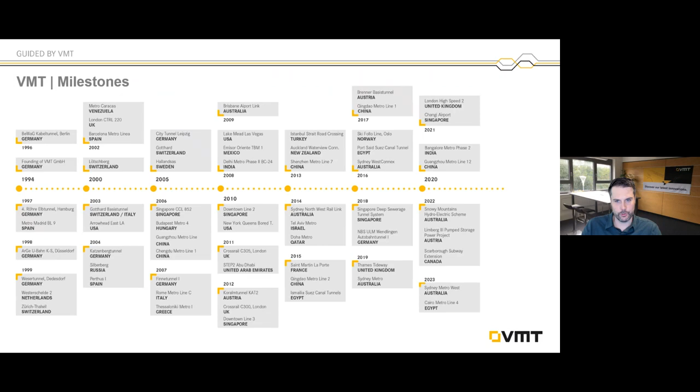What does VMT actually do? It's also important for me to share with you a little bit the portfolio, to have an understanding of where we are involved and how. There's obviously... great, now this animation here isn't working anymore.

It worked before testing, great. Anyway, TBM guidance, and not just purely for guidance of big segmental lining machines, like I mentioned, the Scarborough machine or the Eglinton machines.

You also have to consider smaller diameter tunnels, microtunnel. So there's also a lot of microtunneling work in Toronto, and we're talking in comparison, like a Scarborough 12-meter roughly ID versus 1200 millimeter, so 1.2 meter ID.

So there's a big variety in terms of tunneling, also tunneling methods that we are covering with our solution.

That also means not just TBM driven tunnels are equipped with VMT guidance systems, but also for conventional tunneling with road headers or excavators.

We have proper solutions so that they also ensure they can cut a proper profile with the machines, so they don't over excavate and cut more material out, which results eventually also in more shotcrete, more cost, etc.

A vital part for the segmental lining projects obviously are also the precast segments. So in the production of the precast segments, that also requires proper logistics, proper handling of these segments in terms of the storage, documentation about damages.

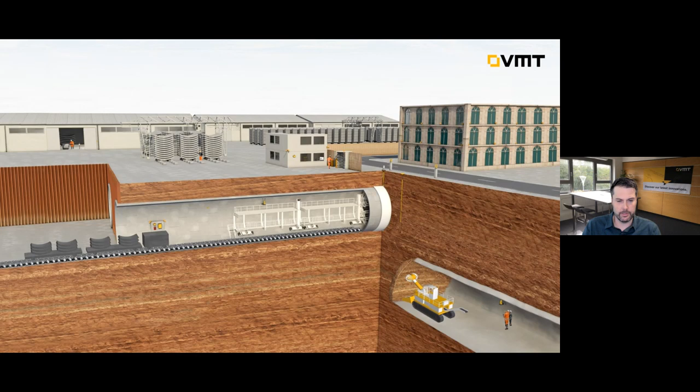They have post-tension rings, so they also have to make sure at what time they have to set in what type of segments, because the longer the tunnel gets and you set the wrong segments in, that means...

...downtime on the machine because they have to send the segments back to the surface, send another train in, and this is also what you want to avoid.

We also know that on each job site, communication is the key. So how people communicate is essential, and these systems can at least contribute to the communication in terms of automating certain processes more.

That's a tendency that we all see where the industry is going, more automation systems, trying to, I wouldn't say take away the work from the people, but definitely we're trying to minimize human error with these solutions.

Eventually also going towards automated TBM steering, automated mining, automated ring build. So that's definitely where the industry is going right now, and all these TBM manufacturers are working on it, as well as their suppliers.

And for the segments, one crucial thing is also the accuracy of the segments in terms of the geometrical accuracy. For sure, we're talking about concrete quality and so on, but that's also an essential part.

These segments have sub-millimeter accuracy, because they're little puzzle pieces, like a jigsaw. You need to put them together and you want to make sure they fit nicely.

For this, we do very precise measurements with what's called a laser tracker, where we go to the facility where they make the segments or where they have the molds. We measure them and compare them to the designs, make sure they're on tolerance. You want to make sure these segments are on the right shape before you send them into the machine. You don't want to be in trouble down there and figure out later that you have problems with cracks on the segments because of bad geometry.

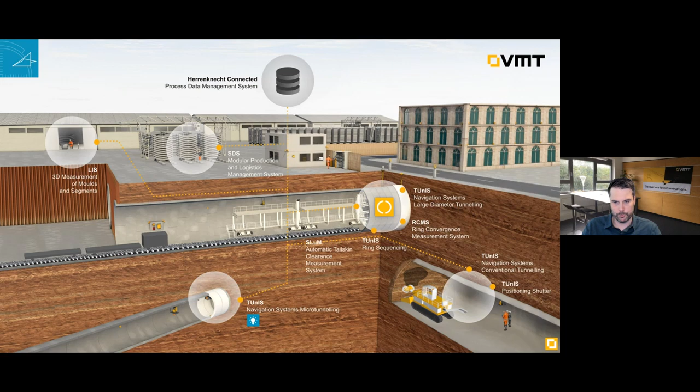So here's the short description about it, what I just briefly explained, but normally there was an animation which should be working but didn't work.

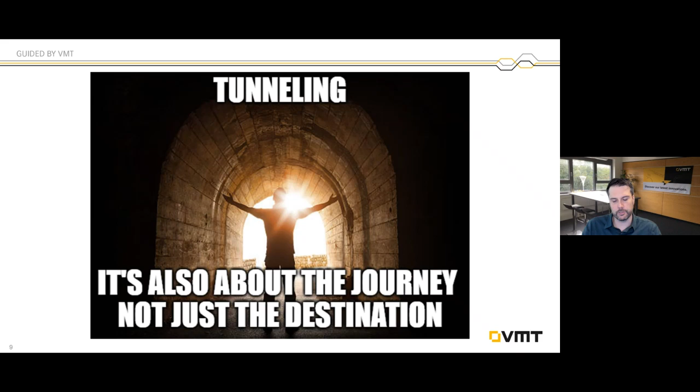What's also important for us when we consider the guidance systems or any other solution we provide, it's about the journey, not just about the destination. For sure, the goal is we need to arrive at point B, but how do we get there? How do we improve our workflow? How do we reduce the risk of people making mistakes? How do we ensure that we detect problems early? This is also a part for us, how we can contribute to it as VMT.

In terms of the guidance system itself and how they contribute, it's for sure precision and accuracy. That was also written in the abstract to this presentation - millimeter accuracy. But it's not just about the system itself, it's also about the people using it. People need to be educated, need to have the understanding to use the tools properly. Guidance systems also contribute to safety.

If we're going offline in a tight curve and we have to steer back with an even tighter curve, what would happen? We might have problems on the segments causing cracks. We have water inflow and so on. So we have direct or indirect impact on safety.

You also want to make sure that the systems are working efficiently for the job sites and they're not causing delays in mining. You don't want to stop a machine because the guidance system is not working. So you also need to consider that the system is well integrated on a tunnel boring machine.

As I mentioned earlier, automation and innovation - the systems are evolving, the technology is evolving, the sensors we are using give us new opportunities. But having these new opportunities with the systems eventually also allows a machine manufacturer to have progress in their developments as well.

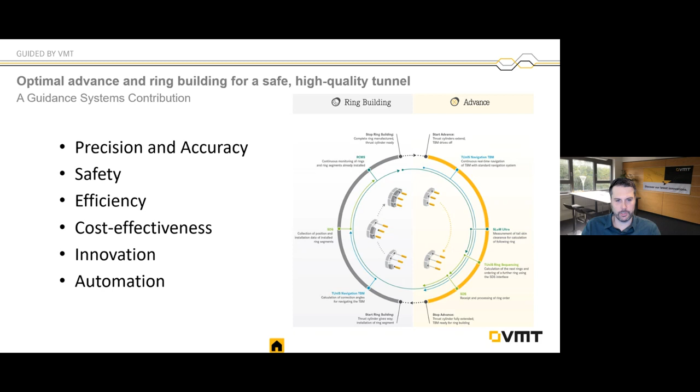When it comes to selecting a guidance system, we are mainly focused now on actual TBM tunnels. So overall, we need to see what kind of method do we have. Are we having a conventional tunneling method? Do we have a segmental lined tunnel? Or do we have a hard rock tunnel with a gripper machine where there's no segmental lining? Or do we have pipe jacking? This defines, first of all, the machine design can define what kind of guidance system is being used.

On the smaller tunnels, you also need to see what are my tolerances, like on a micro tunnel for example - that decides if you can just go with a simple laser because it's a straight run, or if you need to supplement the system with additional sensors to make sure, because of the distance, that you can ensure to be within a few millimeters over, let's say, 1,000 meters of micro tunnel.

And even ground conditions can affect the actual system. Not all systems are optical systems, which require line of sight. The majority of guidance systems use total stations, but there's also what's called a gyro-based system.

A gyro is more or less like a compass, an electronic compass, and gives you a direction. As this compass is traveling, we can calculate where the machine is going.

But these gyroscopic systems are very sensitive to ground conditions. When the machine, for example, is drifting, these gyro systems might not detect it. And then when you do a survey check, you see deviations.

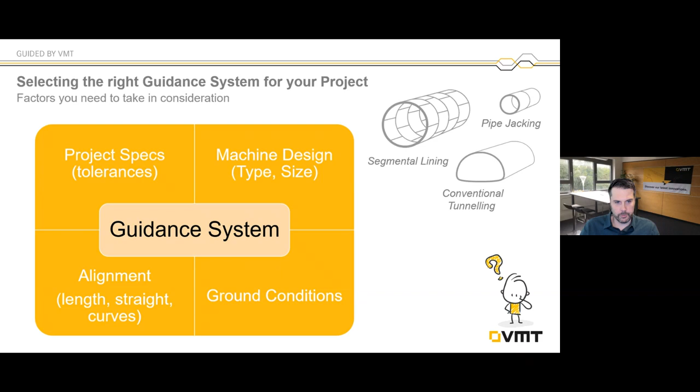But at the end, it's not just the equipment, which is really important to say. You can have the best guidance system, but you also need the right people for it. You need people who have the education, the understanding, the background for it.

And we're seeing this more and more: there's a lack of experienced people on the surveying side in tunneling. There are currently a lot of tunneling projects in North America, but unfortunately people are retiring, and there's not a lot of new generation coming. We've seen that contractors didn't really fill the gap or foresee the future in terms of bringing a new generation on board early on.

Now people are already phasing out, and all this knowledge is gone because there was no proper handover over, let's say, 5 to 10 years. And you're not born as a tunnel surveyor. Nobody is. There's no education for it, no school that can give you all the tricks you need other than going out there in the real world.

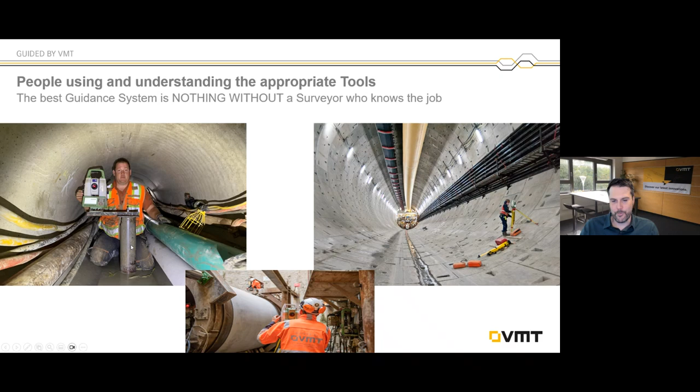When we come back to the guidance system, really important as part of achieving the accuracy of a system is also the surveying part, without going into depth here. But it's really important that the contractor, whether they have a subcontracted surveyor or their own surveying team, really understands what is needed and what the potential costs are.

As a surveyor, you're always at the bottom of the food chain too. A surveyor never really gets attention until the machine breaks through — that's when you get the most attention, or when you go offline. But when it comes to covering costs and how much contributes to survey, they always keep you low on this, and that's very unfortunate because we play a really essential part in it.

Probably everybody contributing to a tunnel project says this, but eventually we should always keep in mind the risks of getting offline — the risks of having a tunnel where utilities are pretty close, existing gas lines, and the risk that you could mine into one of these.

I don't know if you've seen the video of the drill that drilled into a tunnel in Turkey recently and hit a subway tunnel — obviously bad as-built, bad data, bad information, who knows, but also somehow related to survey. So always have an open eye and an open ear for your surveyors, because most of them know what they're doing and know what they need.

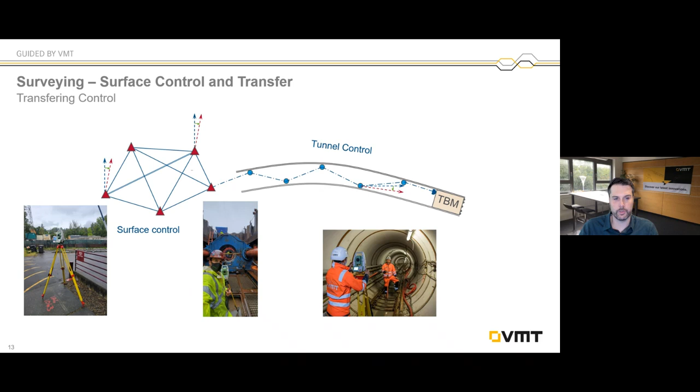And to achieve accuracy on longer tunnels, there's something called a gyro verification survey. There are companies offering these solutions. And this is not the guidance system, this is really surveying related.

Surveyors really need to come up with a concept for how to transfer all their survey control from a portal, from a deep shaft, or from the surface, first into the bottom of a deep shaft, and then transfer it from there all the way to the front of the machine. Because each guidance system, no matter what it is, needs independent checks, not just for your peace of mind.

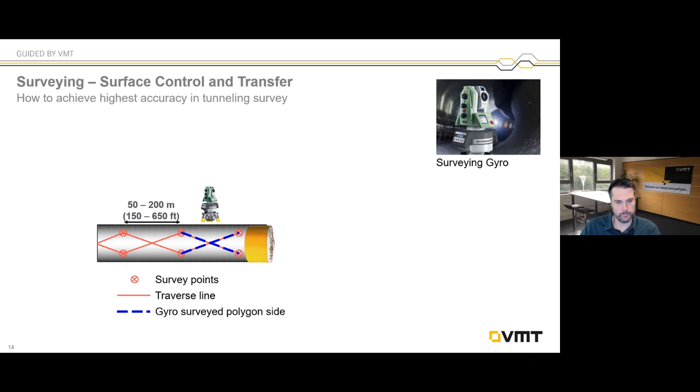Also, each system loses its accuracy over distance. You start off with really good coordinates, but as the machine moves forward you generate new coordinates for prisms out of the guidance system, and they lose their overall absolute accuracy. That means an independent survey check is needed to update these coordinates.

So that means you make traverse measurements, zigzag lines, depending on the alignment and the diameter. The surveyors really need to get creative with this, which means they need to come up with a concept at an early stage for how they approach the tunnel.

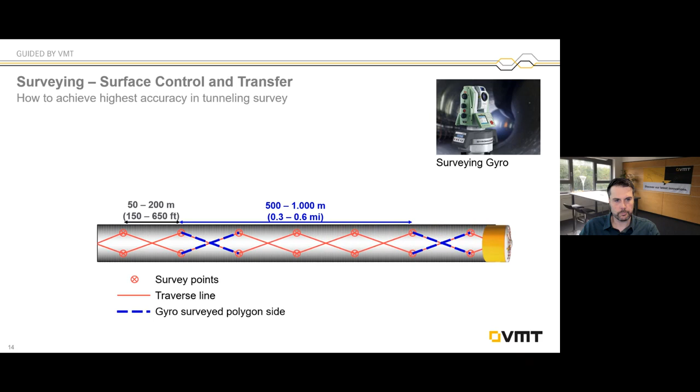But now, finally, we start with the guidance systems themselves. Most of you have probably been on the machine already. If not, this may be your first view of a system. Even if you've been on a machine, there's so much going on that you may never have paid attention to the guidance system and its components.

For standard projects, which are segmental lining projects, whether it's a metro, a CSO tunnel, or a water tunnel, most of these systems use total station-based systems. As you know from surveying, they're mounted on a bracket sitting on the tunnel wall, with wireless communication between the machine and the total station.

The operator controlling the machine needs a live position of the machine on screen at all times, so he can steer the machine properly. He knows when he's approaching a curve, which means he needs to start steering the machine more.

It's like driving your car on a highway where there's an exit. You see the exit sign and know it's maybe 100 meters away. At some point you need to start steering into the curve. It's the same for the operator.

On a subway tunnel, it's typical that when you go from a straight into a curve, you put in a transition curve called a spiral or clothoid. I don't see this much on CSO tunnels, and I can only emphasize and advise you, when working in a design or contractor team, to consider these spirals for CSO tunnels too.

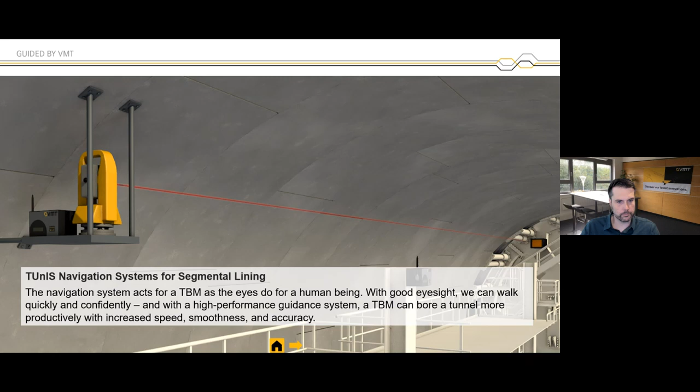And now I'm very unhappy here after I tested these animations a couple of times and they are not working, for whatever reason, which is not great. I need to apologize for this. And now even my computer is stuck, I cannot go through my slides anymore.

What's doing it again? Yeah.

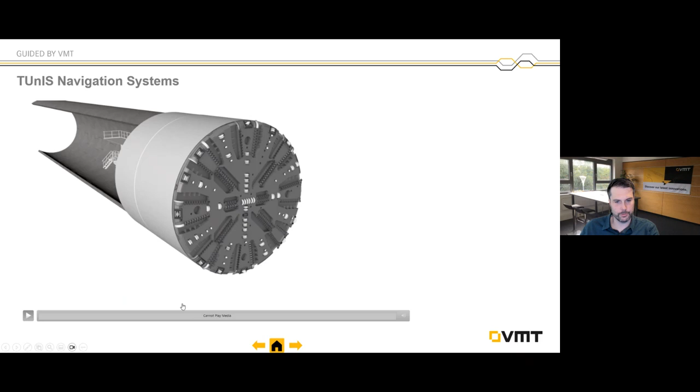Okay, let me explain the principle of the system. On the left-hand side, you can see a bracket with a total station, which is mounted on a segment. As you can see here, this is also a bad example - it's a smaller tunnel, maybe 3.5 meter ID, 3 meter.

Never mount a bracket onto two segments, always only on one segment. That's not beneficial, because as you get closer to the machine, you have movements on these segments too, which can cause an issue on the total station, being out of level. The smaller machines are also critical, since people are walking along this pathway and they can hit these total stations. There's always a risk that people can bump into these brackets, not just hurting themselves, but also hurting the system by knocking it out of level, and in the worst case you have to call the surveyor in to resurvey.

That's why on smaller machines there are different solutions to keep the total station a little bit out of the way. But we have to work around the design of the machine - we have little impact with the guidance systems when it comes to machine design. So with Herrenknecht, we get the drawings at an early stage and give some advice to make adjustments, but Herrenknecht also has to work within the inner diameter of the tunnel, placing all their machine utilities, fan lines, conveyor belts, and everything else in it.

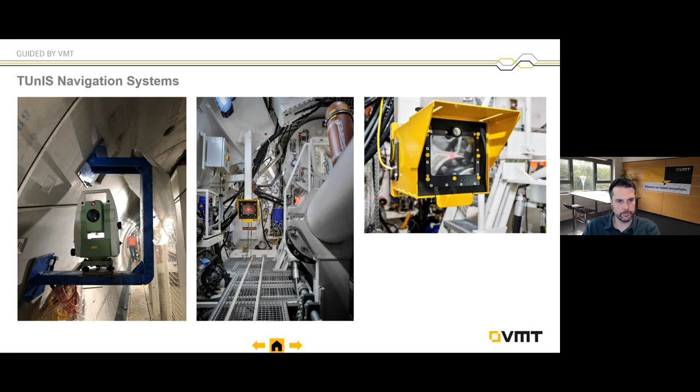Here you can see nicely what is also needed besides the bracket - a radio modem with the total station for wireless communication. There's also some equipment on the machine itself, so we ensure there's wireless communication and no wire necessarily needed between the machine, the trailing gear that's moving, and the actual total station.

In all the older generation guidance systems, there was always a cable, so the crew on the machine had to always keep an eye on it, making sure they don't pull too hard. On some systems it even happened that the machine pulled off the total station with the bracket. So this makes things easier now, having wireless communication, and people don't always have to look for the equipment.

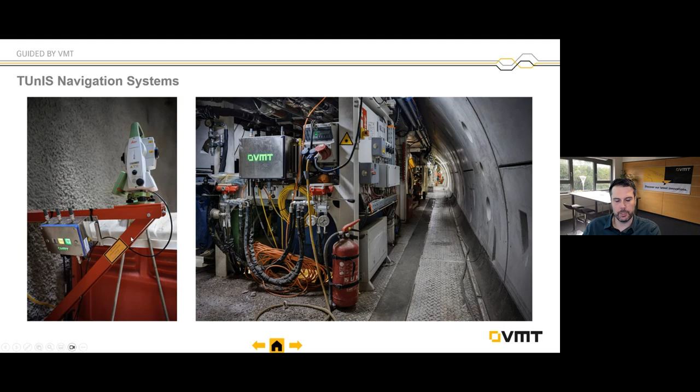This is a typical screen for an operator. I would say the guidance system is a little bit like Google Maps, but unfortunately GPS or satellite navigation is not working underground. That's why we need other solutions with total stations or gyroscopes in the tunnel, and we pre-program these guidance systems with the alignment.

We get the drawings from the contractor and the owner. For subway tunnels, they usually refer first of all to the track. That also means for us, for the TBM, don't get me wrong, but we don't care about the track - we care about the bore tunnel. So that means we need to get the offsets between the top of rail, left rail or right rail, or center of the rail, to the actual bore tunnel.

There are different kinds of offsets for curves because of the dynamics of the train that later runs through. All this gets programmed into the system besides other machine parameters, so the operator can see on the screen what the position of the machine is relative to the alignment. This is a relative position - the operator doesn't care about easting, northing, or elevation. He really needs to know how the axis of the machine, the center of the machine, is positioned relative to the alignment, which is the bore tunnel axis.

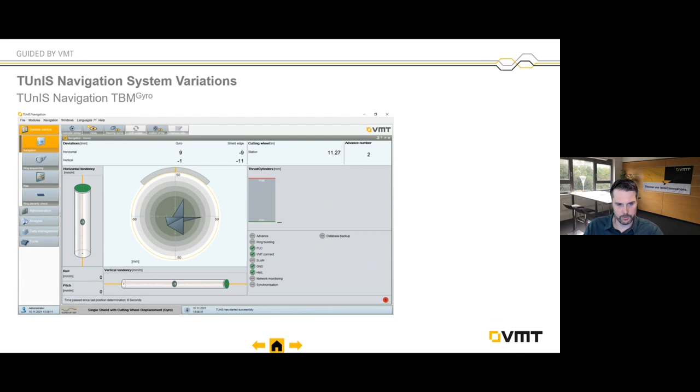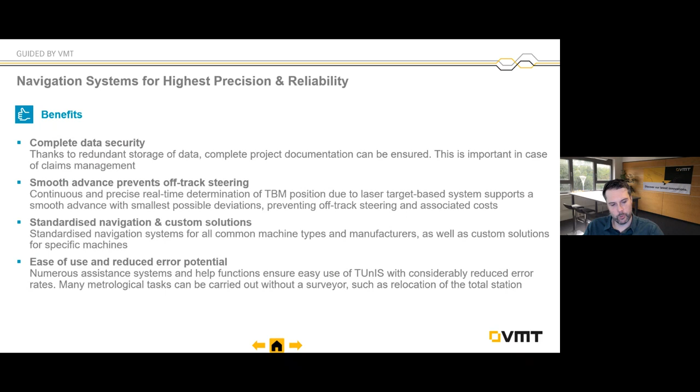We at VMT are also looking at how we can support the operator more in terms of steering, so we've developed a solution. Let me go back here—I don't have this on the screen right now, but when it comes to steering into a curve, we can also display in our system a proposed steering value.

We have seen this also a lot being a problem for operators, not really knowing how much steering difference is actually needed between the cylinders, left and right side, for example, in order to get around a 200-meter curve. The system can at least give the operator a little bit more of an idea of how much steering is actually needed, instead of him going step by step and closer and trying to see when the machine really reacts to the steering. So this is also helpful.

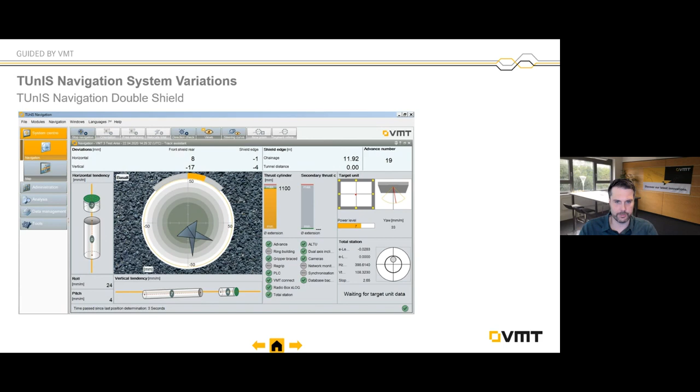To make things easier for the crew on the machine, especially here, either the shift engineers, because we need to see who is actually dealing with the guidance system on the machine the most. For sure, the operator who's in the control cab and is the final user of the TBM position is one person, but interacting with the system, we have either the younger engineers, shift engineers working with it, also older shift engineers, not all of them are young, interacting with the system, and for sure the surveyors.

To simplify the use of the system a little bit, and instead of going back and forth between the control cab and where the total station, for example, is located, the people on the machine have the opportunity to also use an app. So you can install a VMT app on your phone, and you can control the guidance system through the app. This is nothing that goes through the internet. The VMT system has its own Wi-Fi on the machine, so you're not relying on an internet connection on your job site in this case.

For sure, internet connection is needed for remote support. So if you want to call us, you have a problem, it's always good you have the internet on site working. Then we can quickly log in. I can log in from my cell phone with, for sure, a different app for remote support. But this makes things definitely easier.

But for you as an engineer on site, the app allows you to control the total station. You can relocate the total station. Relocating means moving it into a new position because you're getting close in the curve to lose line of sight between the laser target and the actual total station.

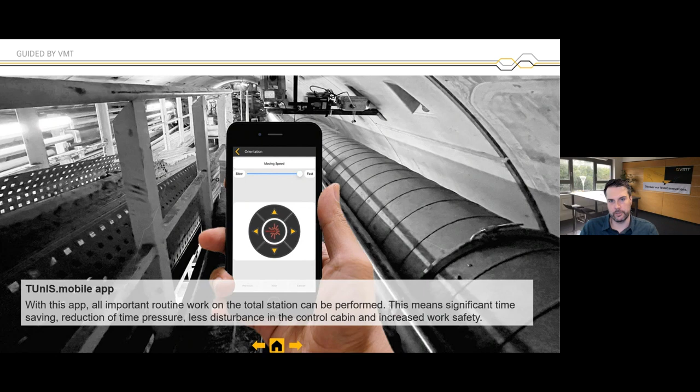This app makes it easier. I remember 10 years ago, people had to go either back and forth between where the total station was located and the control cab where the operator is with the guidance system PC, which is time consuming. And then if you have a problem, then it makes it even worse. Not all the total stations with the laser windows are always nicely located where the control cab is. If you have gotten around the machine, you know it's not always a straight A to B. Sometimes you have to make your way through the machines, and it's not always easy. And also these laser windows are sometimes not easily accessible.

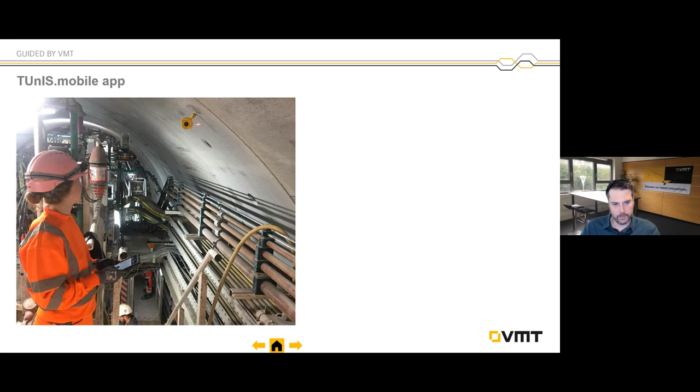Here's another example, actually a different system I will mention later, where the total station is not mounted on a precast segment anymore. That makes everybody more happy, less drilling needed, no handling of heavy brackets. Here this person is using a tablet, so the app runs on iOS or Android, and you can use a tablet, connect to the VMT Wi-Fi on the machine, and you are able to control this. And for sure it's secured, so it's not like everybody can just download the app and start using it. That's clear, that's what it looks like, with different options.

Also for the ring build, you can even initiate your ring build in the VMT software with the keystone position selection in this app as well.

And if you have more than one TBM on your project, let's say we have a surveyor working on the Eglinton project in Toronto with 2 machines, he can have both machines in his app, but it also means he needs to be either on the one machine or on the other one. So it's not like he can, with this app, take over the system on the machine that's next door.

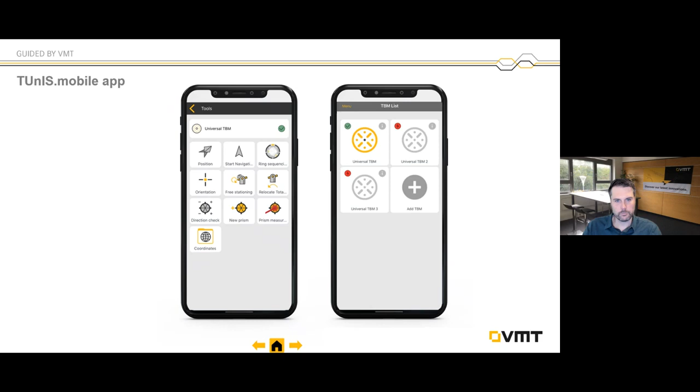This is a newer development from our side. I actually presented this also during TAC last year. It's the moving station, a system that gets more and more traction on these jobs at the moment.

Because of the usability and how the system is actually set up, this system allows us to mount a total station in a fixed position on the trailing gear, while before we had the total station always sitting on a bracket mounted on the tunnel wall. You drill these brackets, usually heavy, sturdy brackets, because you want to make sure they are not moving. Now with this solution, you can have this total station in a permanent location on the trailing gear.

That means the line of sight is always more or less constant, because when the machine is moving, this total station is moving as well. You still need prisms mounted on the tunnel wall, but these prisms now aren't that big. Some job sites even glue them. I'm not a big fan of gluing them, there's more risk something happens to the prisms, but it's definitely a little bit of an easier setup.

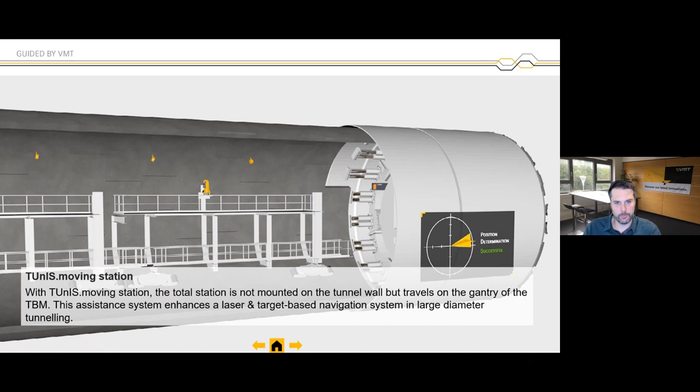For whatever reason, this animation is working, that makes me happy. So you can see here, before the machine is actually moving and the trailing gear is moving, the system performs what's called a resection.

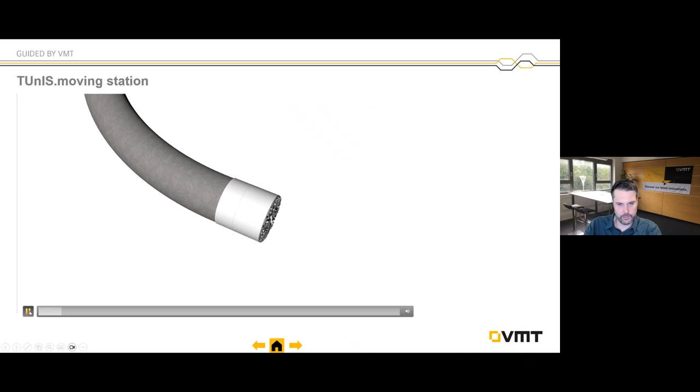What is a resection? The total station needs to measure at least two prisms, preferably at least three, with known coordinates. After this process is completed, we get an actual position for the total station, where it's located, and then the total station can measure to the target in the machine. This process only happens when the machine is not moving.

When the machine is moving, the total station is actually in idle mode, it's not being used. So we do this again, we do the free stationing. After the free stationing...

And once they start mining and tunneling, these thrust cylinders are extending, and we're using different sensors from the machine to continue calculating the machine position. Once the mining has been completed, we can update the position again, and this is how it goes.

At some point, as you go around the curve, you might lose line of sight to one of these prisms. You need to relocate the prism when the machine is not moving, and generate a new coordinate for this prism through the guidance system itself. So basically it's leapfrogging these prisms as the machine is moving forward.

But as I mentioned earlier, it's not like you can just leapfrog and continue mining until the end. You also need to perform regular survey checks. That's just needed. Even if the guidance system tells you you're right on line and grade, it does not mean you're on line and grade.

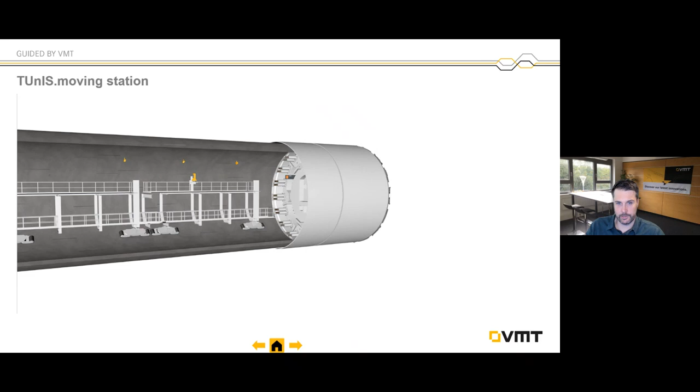It's not like you shouldn't trust the system, but it still needs to rely on the surveyors and the work they do and the coordinates they put in the system, so that the system is actually absolutely reliable, and not just internally reliable without having the absolute accuracy.

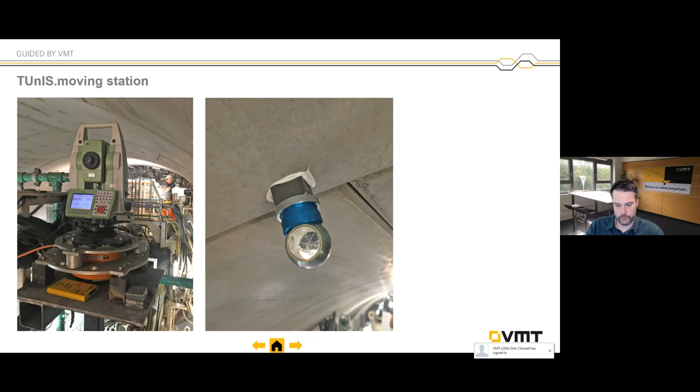The benefit here is there's less risk that people bump into a bracket or the machine can hit it, because it's always in a fixed position. Everybody knows where the total station is, and it doesn't change relatively to the machine's position as the machine progresses.

So you also get a little bit more flexibility in the system with this setup, and it also reduces costs in terms of the additional material that you need.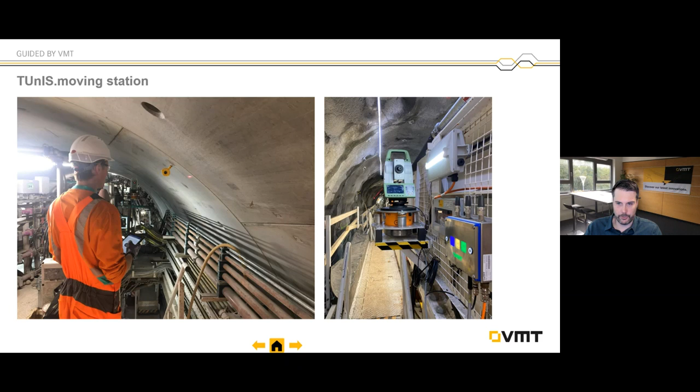In the system itself, you always have the option to switch between two modes. There's the standard mode, having the total station on a fixed bracket, or switching to moving station mode, meaning the total station is traveling with the trailing gear.

And in the system itself, we also have the option for these measurements that the total station is taking to the prisms. They can be manually triggered, or they can be automatically triggered. But they can only be started when the machine is not moving.

So the guidance system knows the status of the machine based on what we call the advance bit, for example, or the ring build bit. This triggers automatic measurements. As soon as the machine is moving, you cannot utilize the total station because you cannot even do a proper resection.

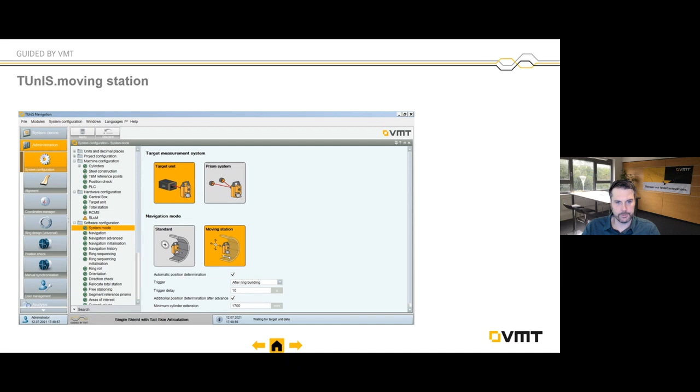So this is the whole process, just in a few screenshots here. TBM position determination: this is the end of the process where the total station first does the resection, eventually shoots to the laser target in the machine, then we generate a position.

And then, as soon as the machine starts mining, the total station is in idle mode, and the system continues calculating in real time a machine position based on roll and pitch that comes from an inclinometer, as well as extensions of the cylinders of the machine.

And AI, or machine learning, is always a hot topic, also for us in tunneling. The guidance system actually learns how the machine is behaving in the ground based on these total station measurements, and compares the data so that we actually predict the position based on sensor values.

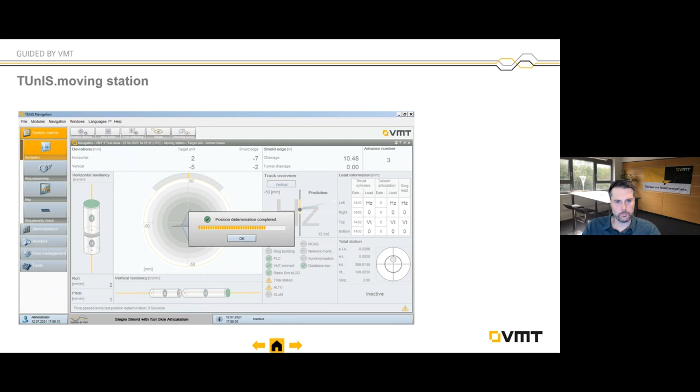There's additional information about the benefits of the system, which I've already mentioned. There's other solutions for other machines, for example the double shield, and I want to mention this even though you won't see it that much in North America, because the double shield machine also needs the right ground conditions.

So in soft ground, you're not having a double shield machine. But what's really important is that we're also utilizing other types of sensors. We're using cameras as well with special markers. They're not like a QR or barcode, but they allow us to also calculate the position of a machine.

So we still have a total station here and a target unit for the rear part of the machine. But since we have a main shield and a front shield, and the front shield is moving totally independent from the rear shield, because we have main thrust cylinders and auxiliary ones, we need to find a way to also calculate the front of the machine.

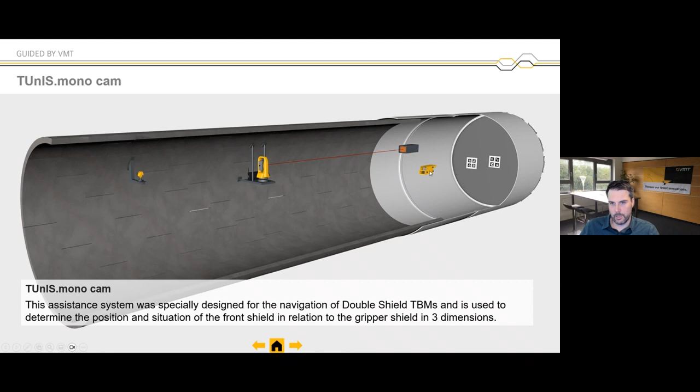So this is an optical system which utilizes these markers, and based on how these markers are moving relatively to these cameras, which have a really high resolution, we actually calculate the position of the machine. I think that's a pretty cool development, instead of just only using lasers and total stations.

And the theory behind this system is now also used on the tunnel formwork system. So we have recently also entered, with our guidance system solution, the tunnel formwork market. Tunnel formwork also needs to be positioned when it goes to the secondary lining, and in these projects it's important that you put the formwork in the right position relative to the alignment.

Normally this is a manual process where a surveyor has to do several iterations with the operator for the formwork, moving the formwork and getting it in the right place, communicating with the surveyor. Now we have more or less a semi-automatic solution. If you have any interest in this, I'm happy to share some information with you later.

But if you have a project, it can be secondary lining, can even be for a station where they need to have a tunnel formwork. This can be used there as well.

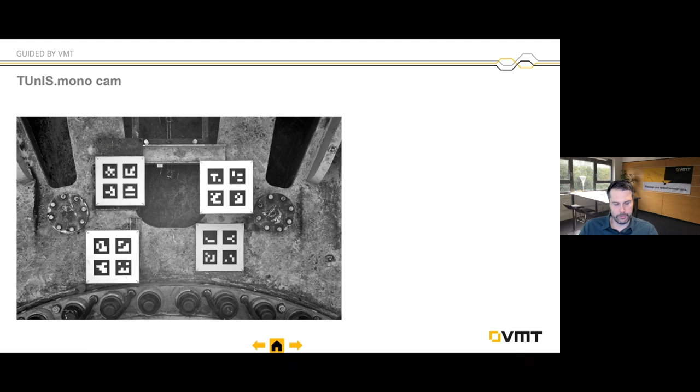We did Thames Tideway in the UK, where they actually did a 360 lining with a formwork of an existing segmental lined tunnel. This was the first project where we used it, and now we're using it on other projects, either for stations or for tunnels that were conventionally built, and then later a tunnel formwork goes in there for the final lining.

I don't need to go too much into detail for the system. Also, the TUnIS.pulse, that's a backup system, so we also have backup features in there in case something fails on the system and the total station is not communicating anymore, or there's a problem on the target unit, or we're losing line of sight.

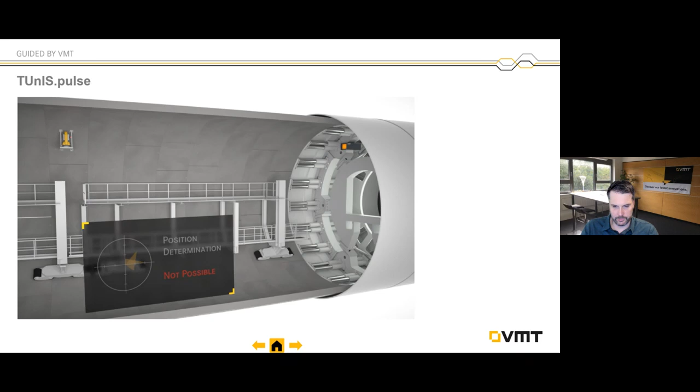So there's at least backup features still to continue mining and ensuring that you can still have a position while maybe the crew is trying to figure out how to get the spare part on the machine, because eventually, based on the contracts and how the specs are written, we also have to ensure that the guidance system is running while we are tunneling. So we have to accommodate for this.

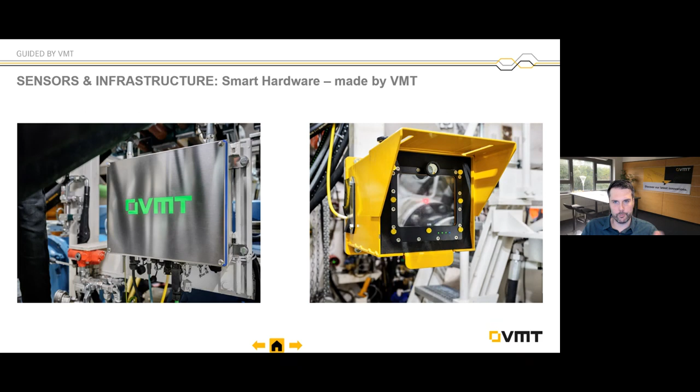A little bit more information about the equipment, which I've already told you about. Really, since we have this wireless communication, also utilizing a Wi-Fi signal rather than another kind of radio frequency, taking the benefit with the app was definitely also a game changer, not just for VMT and our engineers, but also for the job sites.

But I also have to mention, if we still do tunneling with total stations in 10 years, that's questionable. The technologies and sensors are improving, so we might not even see a guidance system with total stations in the future. There might be other options, and I have to admit, we're also working on some right now.

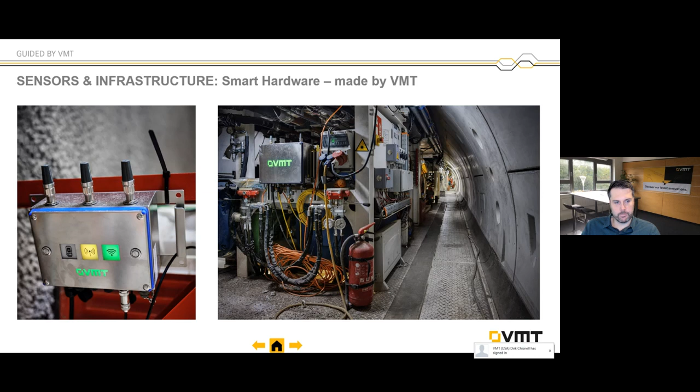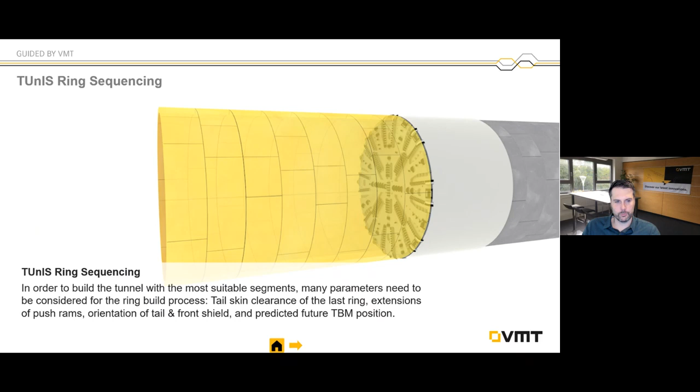We still have time, I don't know, Graham, if you can say something. We have 5 minutes. I know the focus was more on guidance, but placing the machine in the right position is one thing, but placing the precast segments in the right position behind the machine is even more important, because that's the final product most of the time, unless we have another type of lining. So that's why I would say we definitely jump into this too. Yeah, no problem, Matthias, keep on going. Okay, sounds good.

Okay, great. Also, this is not working for whatever reason. Now you can say I was badly prepared. I can only say I did all the commissioning and testing in the factory, literally, and now on the job site it's not working, and I have no explanation why, because I went through all this.

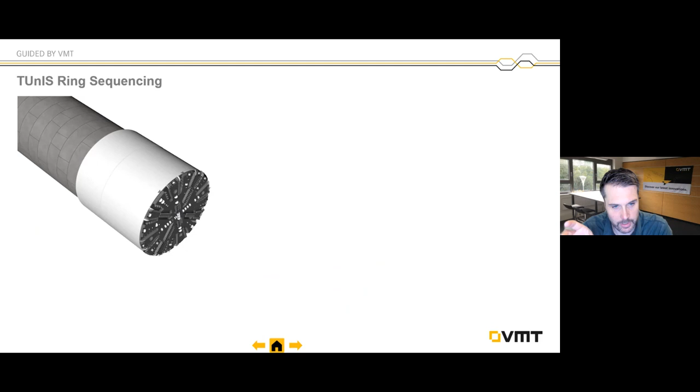Anyway, the idea of the ring sequencing software is utilizing data from the machine, in terms of what is my position relative to the alignment, how is the machine steering, what are the extensions of the thrust cylinders, in order to calculate the correct position of a ring that's being built behind the machine.

So each project has a specific ring design. When I say a specific ring design, it's not just the diameter or the concrete—I'm talking first of all about geometry, which is more important to me first. So they have a different taper, and the taper defines the feasible radius you can achieve with your ring design.

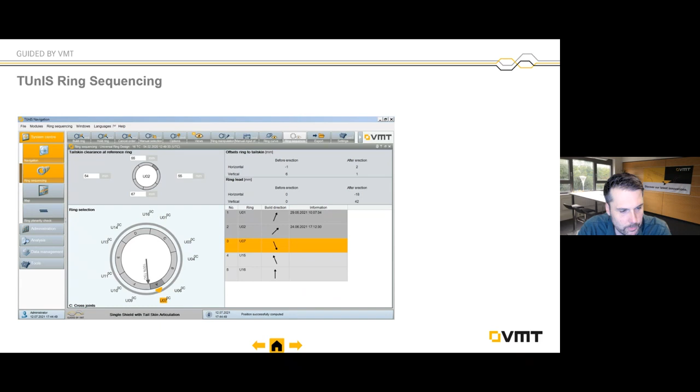A rule of thumb I like to give you: let's say your alignment requires a curve of 300 meters. Put enough safety factor in there for what your ring design can actually do, so you can compensate for going offline. I usually recommend a factor of square root 2 as a rule of thumb. So if you need to do 300 meters, divide that by 1.4, and you might end up with 210 meters that your ring design should at least achieve. So it's something to keep in mind.

I also see sometimes people making mistakes when defining a minimal radius. They only look at one ring in a sequence, checking what that one ring can do when the taper—the skinniest part—is right on the spring line. But your actual ring rotation might not allow it, or even your combination of rings, where you don't want cruciform joints between adjacent rings, won't allow you to build this tight radius. So when doing the design or planning, always put enough safety factor in and take this into consideration.

This also eventually factors into machine design when it comes to tail skin clearance, which is the gap between the extrados of a ring. So looking here on the screen, this gray circle on the outside is the tail shield as a visualization. As you can see with A, B, C, D, E, F, these are the segments of a ring, the precast segments in this case.

We pre-program our system with the dimensions of these segments, because that's crucial for the right ring selection, and for making sure when building the sequences ahead of the project—depending on the ring keystone position, not every combination is possible, since you don't want cruciform joints between adjacent rings. So you look into this and exclude certain sequences, to ensure that people don't build the wrong combination of rings.

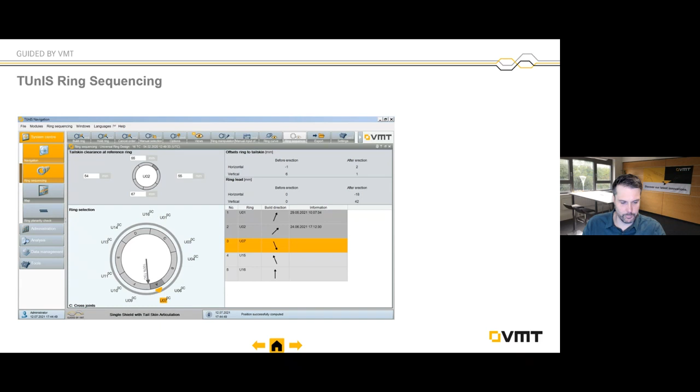Now we see a lot of universal rings, and people are not really concerned about keystone below spring line, mostly for safety reasons, or also for assembly of the ring. You can imagine when machines were less sophisticated, it was more critical to wedge the keystone into the invert because of gravity - you have heavy segments on top and a small segment at the bottom, which is the keystone, so there was also safety concern there. That's why left and right ring design was always quite dominant, especially in subway projects, but I see more and more projects where they can just put the keystone around the clock. So people, I'd say, haven't become more adventurous - they just have more trust in the systems, the machines, and their safety.

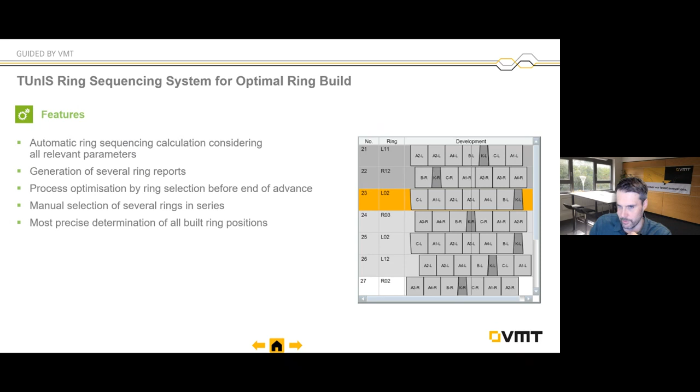A crucial value also for the ring build and ring sequencing is the tail skin clearance. As I mentioned earlier, that's the gap between the extrados, the outside of a precast segment that sits inside the tail shield, and the actual tail shield. What you don't want is physical contact at any time between your tail shield and your segment. It will happen, especially in curves, vertical and horizontal, and tight turns. But the preferred option is to always nicely place your ring perfectly centered in the tail shield, so you have a nice gap on each end.

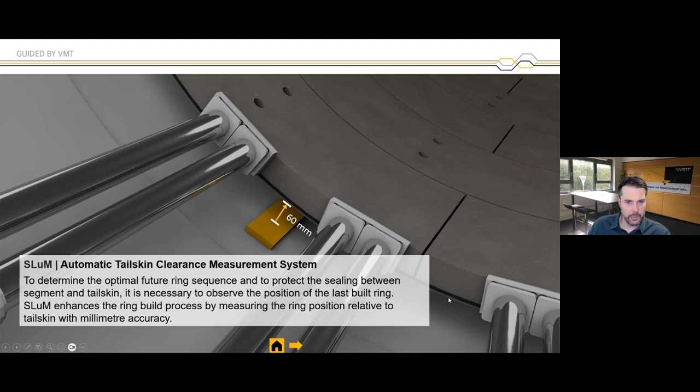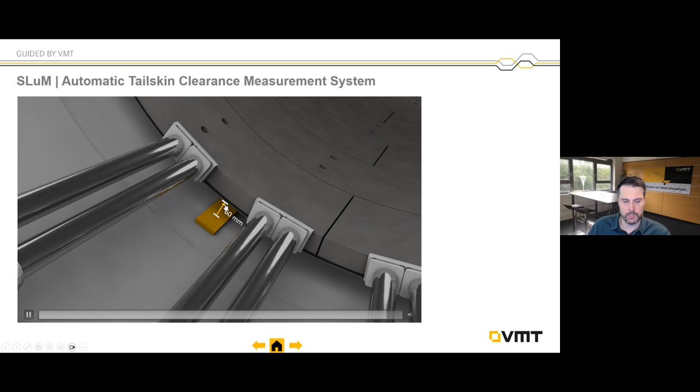In the ring selection and ring building process, you need to measure these gaps before every ring build, and this can be done manually or automatically. There are system solutions that can measure this mechanically automated or with ultrasonic sensors on the machine, so people don't necessarily need to take a ruler or tape. With the ruler solution, the bigger the machine gets, the more difficult it gets to take these measurements going around the erector. You need to take this in 4 locations: 12, 3, 6, and 9 o'clock position when looking in the direction of tunneling. This can also be automated.

When people do the manual measurement, eventually you only care about the extrados and the tail shield. To read this number on the outside is really hard, so you can also do the measurement to the intrados, the inside of the segment. As long as you're consistent on all 4 locations with your measurements, that's fine. But don't do one extrados measurement and then one intrados measurement, which are basically off by the thickness of the ring - this would mess up the calculation and isn't correct. The system wouldn't even accept these values.

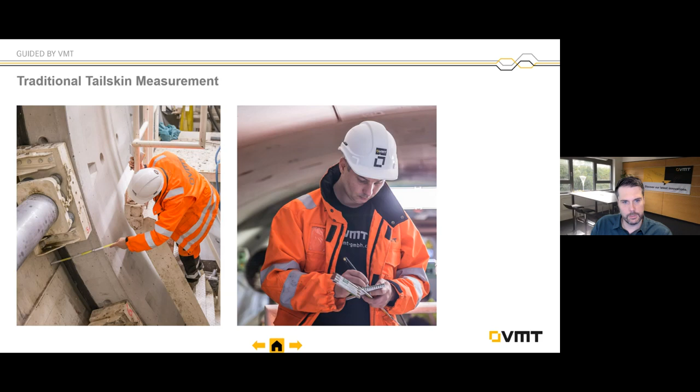But if you go in the manual, traditional mode, people need to write down these 4 numbers, communicate with the control, and give it back to the people - which obviously can be automated too by having these sensors placed.

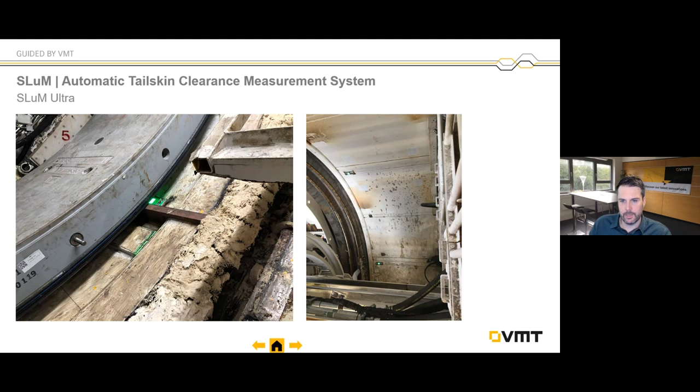So there's an example of an ultrasonic system. I have to admit the system was having issues, especially in the invert, because there was mud, water, and sometimes even grout on top. You need to keep this clean, otherwise you get false measurement or no measurement, and the system would certainly fail. That's why we went the next step and had at least a mechanical solution, called SLuM Touch. I won't explain why it's called SLUM - with a lot of German companies, given the German background of the name, it would be too hard to pronounce otherwise.

This works with compressed air, and there's a cable for the data, so we measure the actual angle this arm is moving when it touches the segment. The segment sits on top of this sensor, and when you initiate the measurement, it increases the pressure on the hose line, which moves this arm, and then we get the readings. As soon as the reading has been taken, they release the pressure again and the arm gets back into its parking position. But with every piece of equipment, if you don't maintain it, it might stop working, right?

If you leave the grout on it and the grout gets hard, then it will stop working - it's not like this can break free by itself. So you also need a crew who is looking after the equipment, and this includes equipment related to the guidance system.

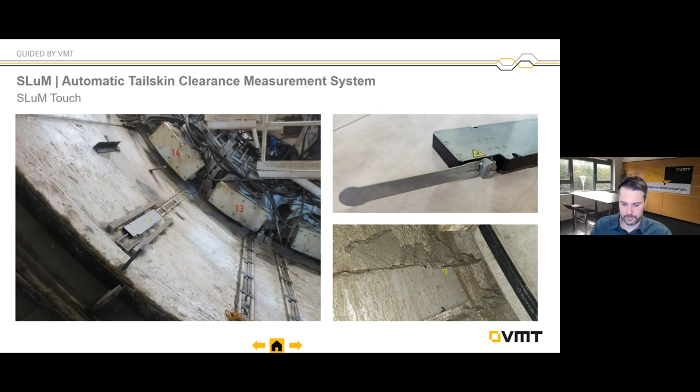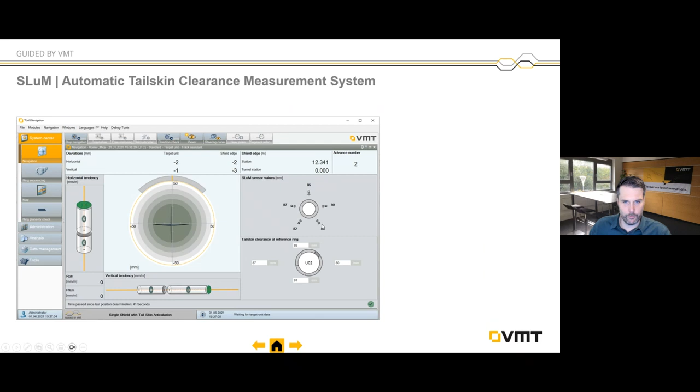This is the automatic system measuring the data and automatically transferring it in here. As you can see, this is in the looking direction of tunneling - we usually use 5 sensors. Normally we don't put one right into the invert, because that's where all the material accumulates and piles up, so you try to break free a little bit from this area. That's why we usually put them in the 4 or 5 o'clock and in the 7, 8 o'clock position.

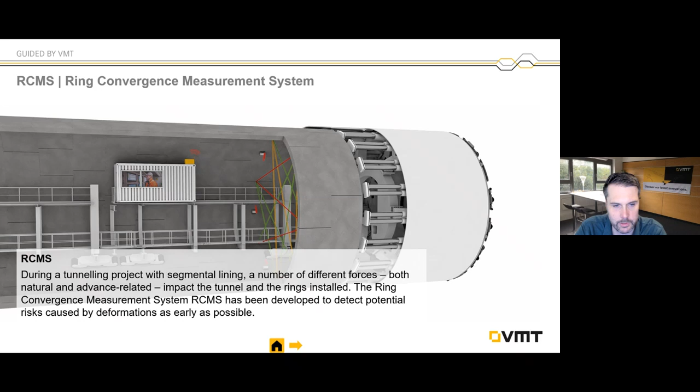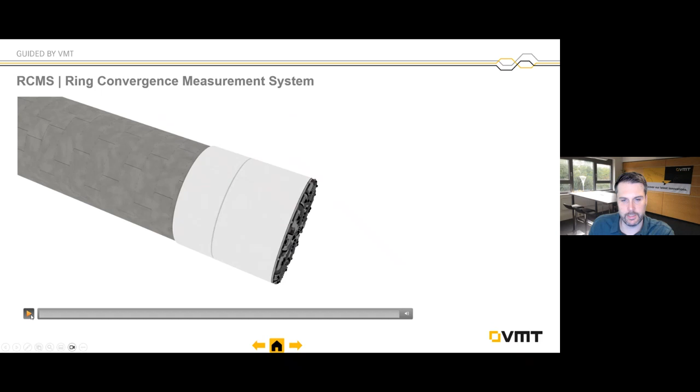So for this, there is an automated solution called RCMS, the Ring Convergence Measurement System, which allows you to monitor the movement of the rings in more or less real time. As the machine is progressing and moving forward, these sensors give live data. It's a wireless installation, giving live data to the operator screen or the engineer screen, which allows them to see directly what is happening there, or even see if there's any movement when you grout the segments.

These systems are not only used purely right after the ring was built. You can also place them, for example, when you do cross passages and the cutout for the cross passage on a subway tunnel. You need to monitor the rings adjacent to the cross passage, or the segments right in the cross passage area. You can always have a surveyor there doing it, but if you don't have enough people, and you need the data faster while doing your cross passage excavation or cutout, then you can have an automated system, taking away the need for a manual survey, and even having somebody who still needs to process the data, or go out of the tunnel first to get the results.

I guess nowadays with technologies and sensors, we're all used to having instant information and getting it directly on a PC, on a website, in a cloud, or on a mobile device. That's the same here too.

Here's examples of how these sensors are mounted. There are different types in terms of size. Why different types? The bigger ones on the left-hand side are easier to maintain in terms of changing the battery, the internal battery, so they're all battery powered. The smaller ones have like the size of a baseball, which makes it easy to install. They can be glued, or we can use bolts to attach them to the segments, so they can also be easily removed again. With the older systems, there were still wires, which was always a little complicated to set up. The best time on a 10-meter machine, it took me 1 hour with the old system to set it up; with this one, it might take you, let's say, 20 minutes, and you have it running.

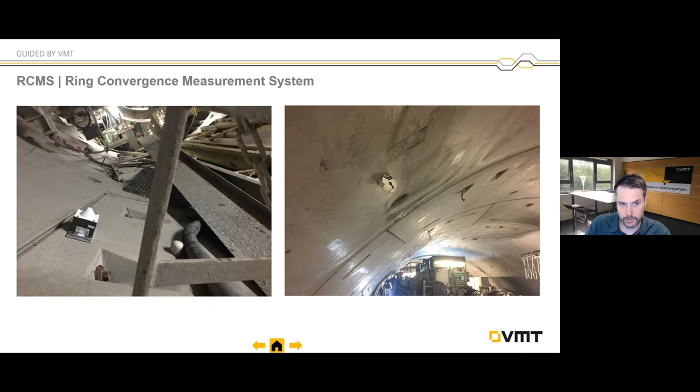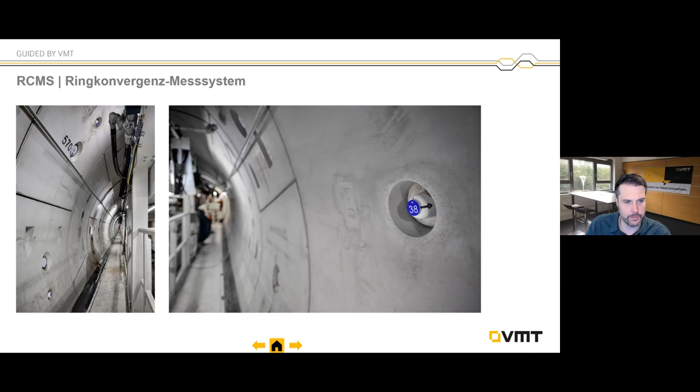Now here, some job sites got a little more creative. They put these sensors actually in the pocket, here where the cone goes from the erector lifting devices. That's definitely also a nice option. You have less exposure, easier installation, no drilling at all needed. And this is what you see in the data.

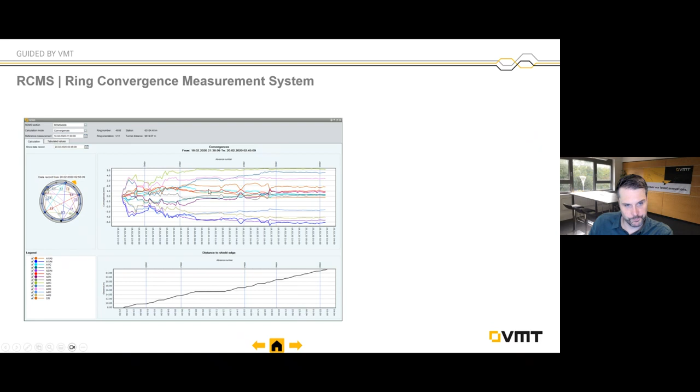You're not getting this kind of dense information from a regular surveyor, because the surveyor won't be able to give you this information while the machine is mining, for example. The accuracy we quote is about plus or minus 1 millimeter. Typical intervals for this can be changed, so you can have 5 minutes, you can have 1 minute. It's not necessarily needed to measure in 5 second intervals. For the end user, for the engineers, you have a PC in your office, you can create a report for your own purposes, give it to the owner, so you can tell them exactly about the monitoring and the results.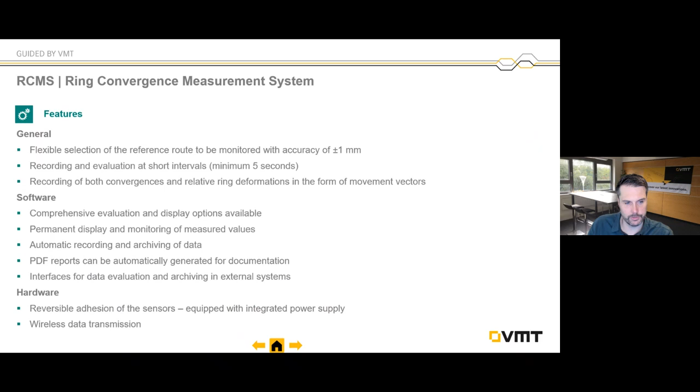Okay, that's all about TBM tunneling for now.

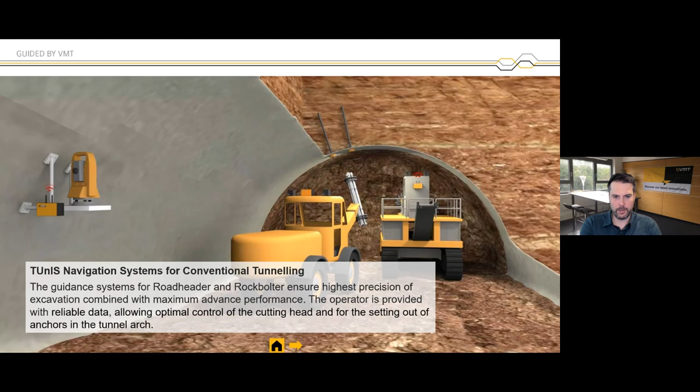This will be in person. There will be more interaction, I know our attendees. Pretty sure, yeah, again, of course.

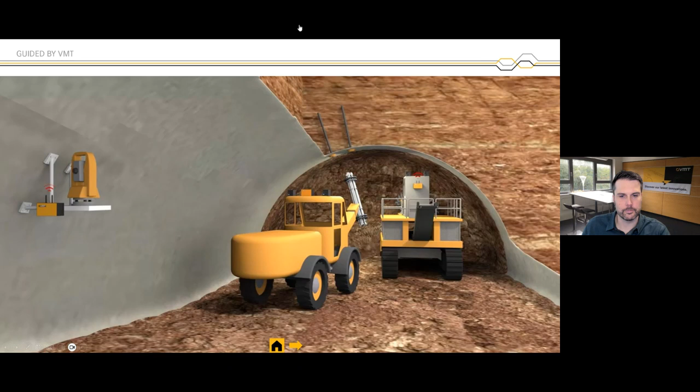While our attendees are still here, I think we can still have a little bit of a conversation in the next 5 minutes or so. Matthias, there's a lot of really great information there. For people who maybe don't have as much experience on tunnel boring machines and site experience, what are the three main or couple main details when you're curving a tunnel that need to work together? For example, how do ring selection, surveying, and even the TBM operator all kind of mix together to successfully curve a tunnel on the alignment? And do you curve a tunnel quickly, or how do you plan a curve?

Yeah, I mean, let's say we're not necessarily planning the curve. Everything starts on a piece of paper, first of all, right? So we have an owner with a project, and there's a requirement either to bring people from A to B in an urban area, or bring water or sewage from A to B in an area. So then you plan your route. When it comes to route planning, the designer should also look at the capabilities of the equipment. Sometimes I see some approaching certain projects a little bit adventurously, especially in the microtunneling world, trying to push boundaries in terms of distances and tight diameters, and accessing the tunnel eventually. Because at the end, in a microtunnel, for example, you have people who still need to go in there and do the work. Not necessarily being in the tunnel all the time, but the surveyor still has to go in there. And if you have a 1200 millimeter ID and you go for like 600, 700 meters, it's definitely not a nice environment. Maybe sometimes you need to think about increasing diameters.